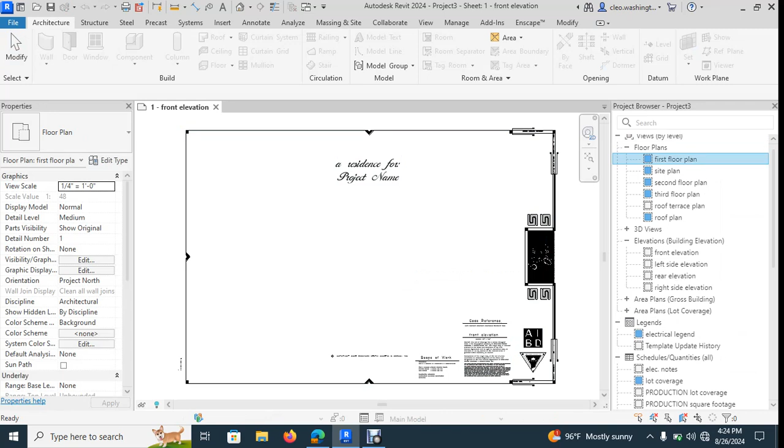And when you do work for a company that uses metric values, they'll specify as such. So you want to click on Architectural Template, make sure you have the Imperial value selected, and click Open. That's going to open up a brand new architectural template. For this portion only, mine is going to show a little bit different from yours, but it's all the same.

So when you open up your model, you're going to get this interface. Hopefully you guys went over the interface last week — that's why I uploaded that video, so you can have some familiarity rolling into what we're working on this week, which is the beginning of the creation of the model. What you'll see is when you open up this Revit architectural template, you will have a window something like this.

You won't have the reference planes drawn, so I'm going to hide them here. This is something I can show you guys — it's called hiding things in view. If you're familiar with AutoCAD, it's kind of similar to toggling layers on and off. To do this quick and dirty — there is a portion of Revit where you can actually create layers and assign different attributes to them, but we'll get to that when we get to that, probably around module 4 or 5. So just keep it simple today.

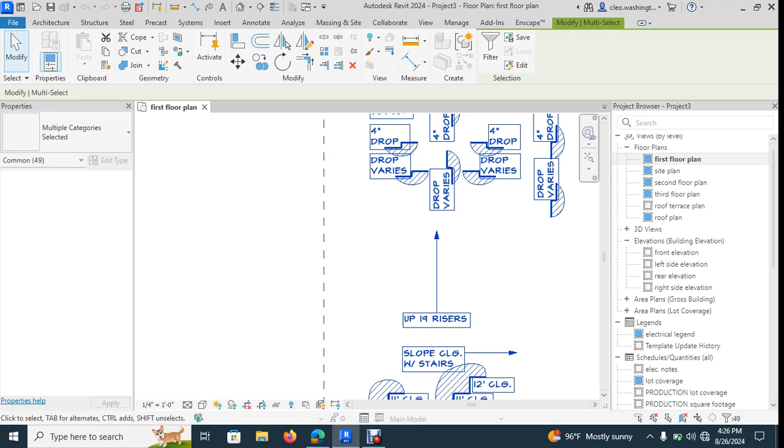If you have something in your drawing that looks like this, it's called a reference plane. I don't want to say turn them off — if you have reference planes already in your model, go ahead and select them and delete them. Right now, we don't need them shown here. These are all text and things that I use for a specified template. We won't be using this stuff in this model because you guys are working in a more simplistic template.

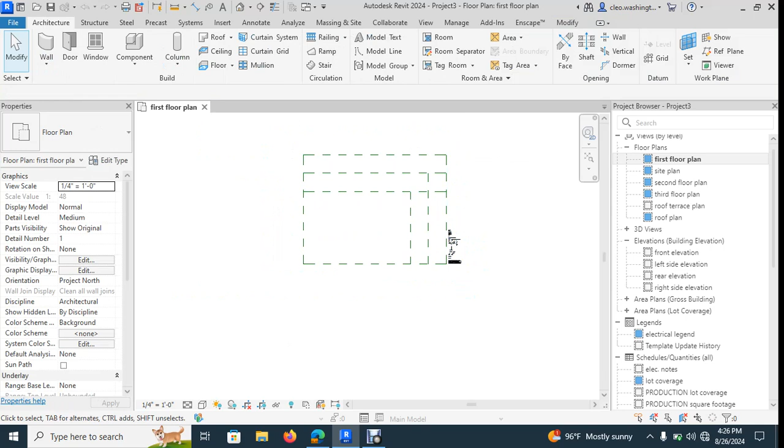I do real world projects, so a lot of the times my templates are going to be based on the projects that I'm working on and based on the specifications of that company that I'm doing contracts with. So let's just keep it clean and simple here. Let's just delete anything that's in there, and you guys will probably have some elevation markers. Just leave those alone for right now.

Okay, first things first, we're going to go ahead and start drawing the model. First thing we're going to do is draw the walls. If you went over the video last week, you know you have the architectural template, the structural template, the steel template, precast, insert, annotate, collaborate, massing and site. I won't go over them all, I just wanted you guys to have a brief overview. This is why I wanted you to watch that video last week. The way it works is we'll go through each tab as we draw the model. That's the best way to learn, and plus it will provide some repetition for you, as when you're drawing walls, you'll draw more than once, okay?

So first things first, let's go ahead and draw the architectural walls, okay? What we're going to cover today: architectural walls, how to use the selection box, the mirroring function, the create similar function, and how to use the start and end radius arc function when drawing walls. We're also going to go over the view cube, okay?

We're going to show you guys how to manipulate the scale of a project. And we're going to show you guys how to turn off and on the project browser, which is over here, and the properties menu. We'll get more into that as we matriculate. We'll show you guys how to actually look at the 3D view once we draw the walls, okay? And we're going to show you guys how to put in elevation markers and how to toggle the graphic display options, right? So first things first, okay?

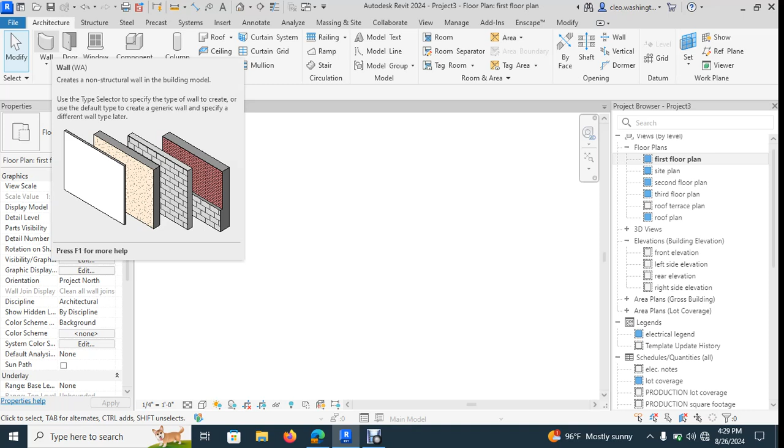Hot commands is something I am going to require you guys to use in this class, because as stated, in this course, in this software, in the field of architecture, time is money. So we want to make sure that you're maximizing your level of efficiency by using hotkeys and hot commands, okay? So instead of clicking the wall icon, go ahead and type in WA, and now you see the wall icon has already turned on and has become active, okay?

So what you want to do is go and click exterior brick. I have a bunch of different walls in mind, okay, but what you guys are going to be using is exterior brick on CMU, okay? Exterior brick with the 2x6-inch stud, all right? So you want to go ahead and click that wall, okay? You can click exterior - you want to have this one, exterior brick 2 sides - but go ahead and click exterior brick with CMU block base. That's what you guys are going to have in your drawings, okay?

So let's scroll down and go over all the wall types. We have curtain walls, generic 8-inch wall, generic 6-inch wall, generic 12-inch walls, and then we have the bricks and things of that nature.

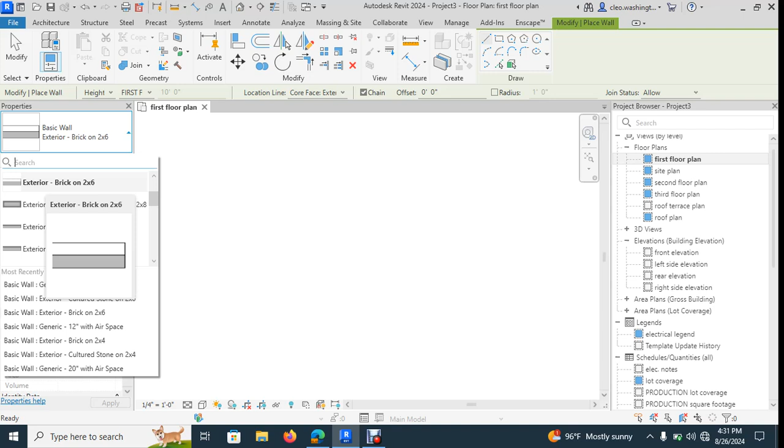Again, I do have some customized walls loaded into my template because I do all different types of exterior walls. But the wall type that you want to select is exterior brick on CMU.

So once you have that wall type selected, you want to come into the drawing menu and just click in. As you can see, you have your wall command active. So let me hit escape to get out of it.

I just wanted to show you guys how to start drawing a wall. Let's go ahead and click in, and you're going to drag to the left. We want this wall to be 100 feet. Revit actually works in feet instead of inches. If you're familiar with AutoCAD, if you type in a value and hit enter, it's going to put that value in inches, whereas in Revit, it's going to put that value in feet.

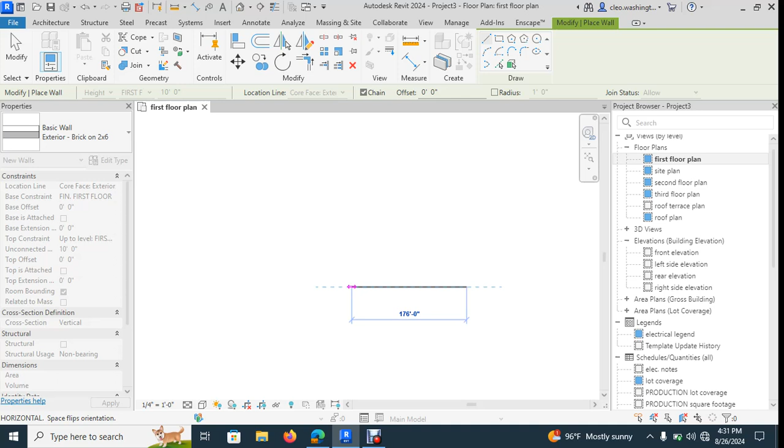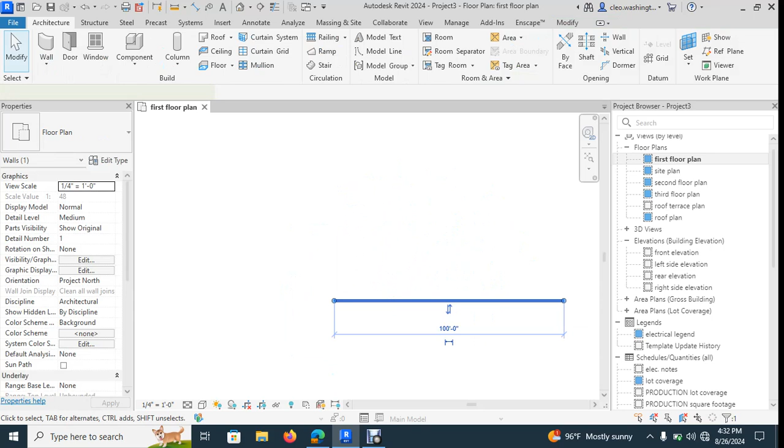As you can see, you can drag it out and kind of stop it at 100 feet, but for time purposes, you want to just go ahead and type in 100 while the wall command is active, and then hit enter. Now you have that wall, and it is actually 100 feet long. If you select it, it'll tell you that this wall is 100 feet.

Let me undo because I want to actually draw all the walls in as a chain. So type in WA, and see this option right here, chain? You want to make sure you have this option selected. If you don't have that option selected, then it's going to draw your walls separately.

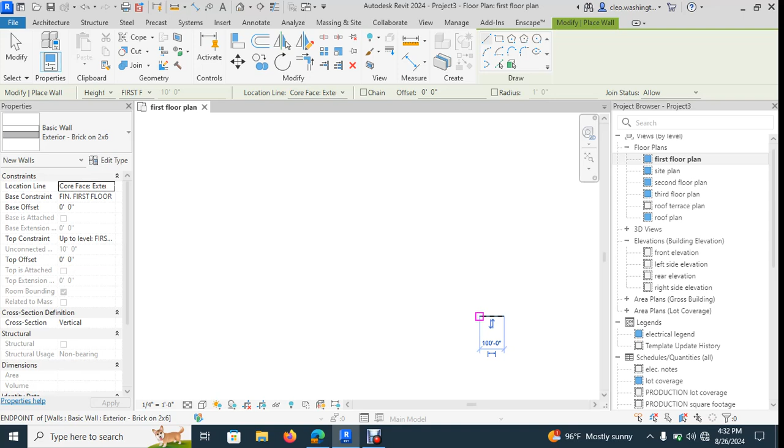So if I go here and typed in 100 and hit enter, now I have to go back and click right here to draw another wall that's going to be connected to that wall. You follow me? So you want to make sure you have chain connected, because let me give you a demonstration of how that would actually work.

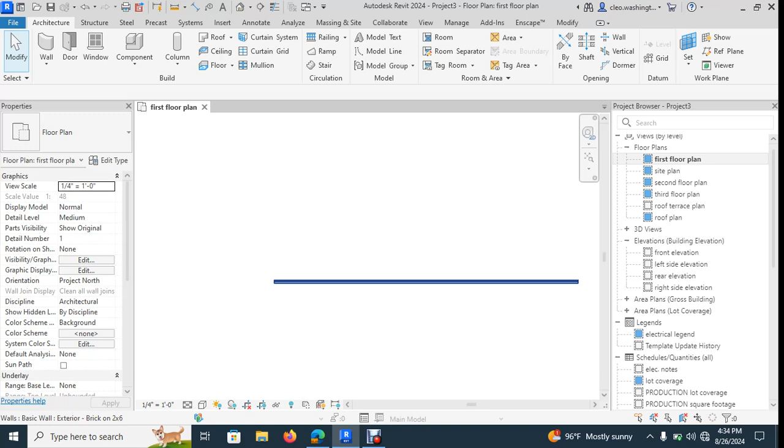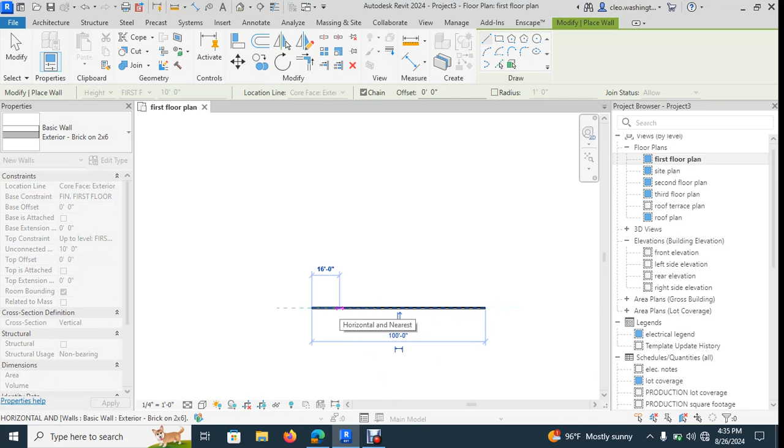Okay, let's delete this and start over. Type in WA, and I wanted to show you guys how the chain function works. Hit escape and make sure you type in WA, and check the chain function back on. You want to come here, click here, type in 100, and hit enter. Then drag your wall northward. You see how the chain function works? The walls are connected together.

So you want to come up here and type in 80. You guys can just follow me along in the video. We are actually building the model. Now you want this wall to be equivalent to the first wall that you drew.

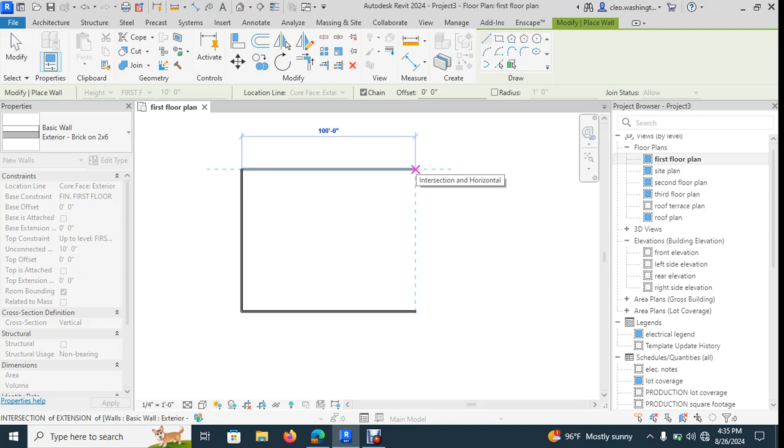So instead of typing in 100, you can just drag it. You see the blue dashed line? That lets you know that that wall is in alignment with the wall that you drew down below. That's what that blue dashed line means. So instead of typing in 100, you can just click there, and the wall is still being drawn in as a chain.

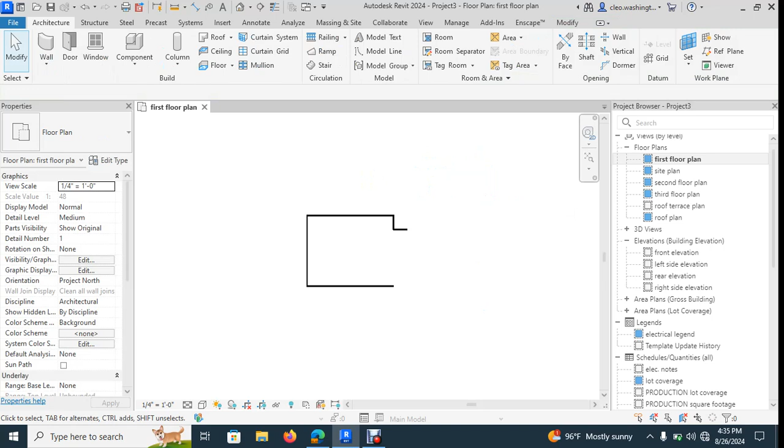So you can come and drag the wall down southward and type in 16 for 16 feet. Then let's drag the wall eastward and type in 16 again for 16 feet. Then get out of that command. You should have something that looks like this.

What Revit is doing is once you have begun to draw in Revit, you will see that while you're drawing the 2D plans, it's actually creating the 3D model.

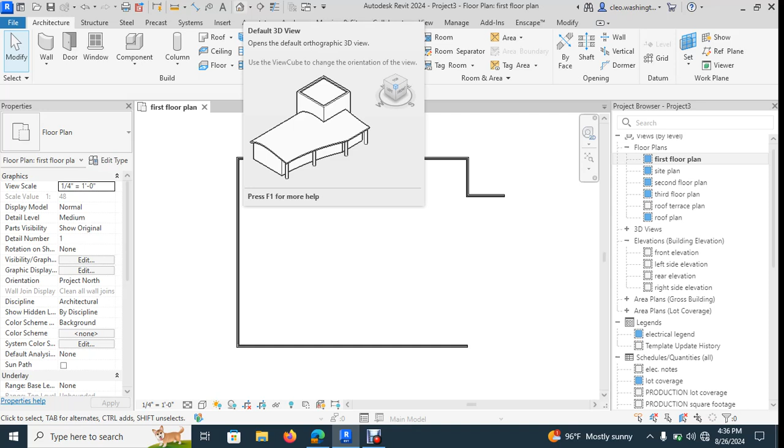So let's go up to the top right here. See at the top right here, I don't know if you guys can see my cursor, but you see this 3D house? Just click on it. And it's going to give you a three-dimensional view of the walls that you had just drawn.

Now, first things first, if your walls, you should have walls that have a gray bottom and a red top. You should have those types of walls, right? So now what I want to do is go here and let's go to hidden line.

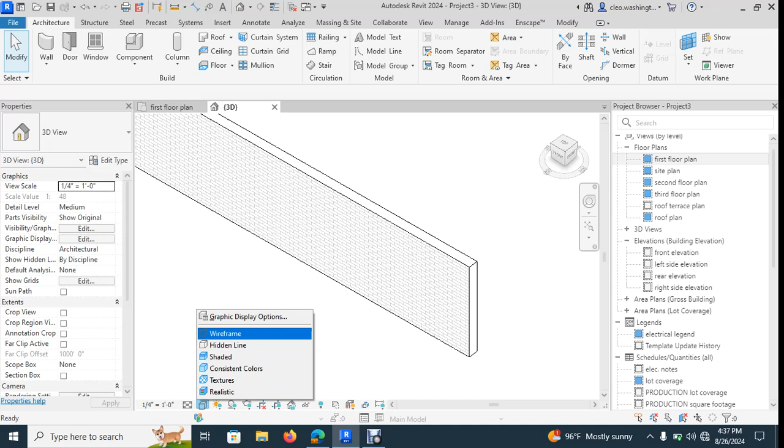Let's pause it right here. Okay, let's click this little cube at the bottom. See this little cube? It says visual styles. You click that.

You can turn this wall into a wireframe, or go back and click that cube and tell it you want it shaded. Or click the cube and tell it you want consistent colors, which puts actual color and texture to it. But we'll get into that a little later, I just wanted you guys to see it.

Actually, go back and put it on hidden line, that way your computers aren't working too slow. But I wanted you guys to see something as it regards how Revit actually creates a 3D model.

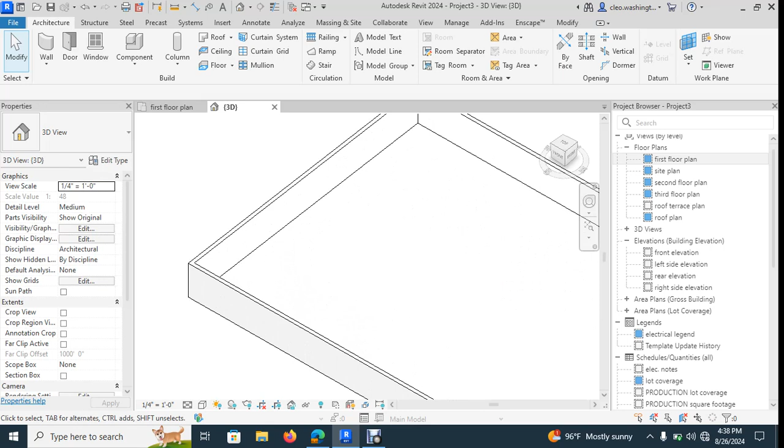Before we go back to the first floor plan, I want to show you something. You see this wall, how you have the brick on the exterior? And see this wall around the backside - if you press down the wheel on the mouse and hold down the shift key, you can orbit around the model.

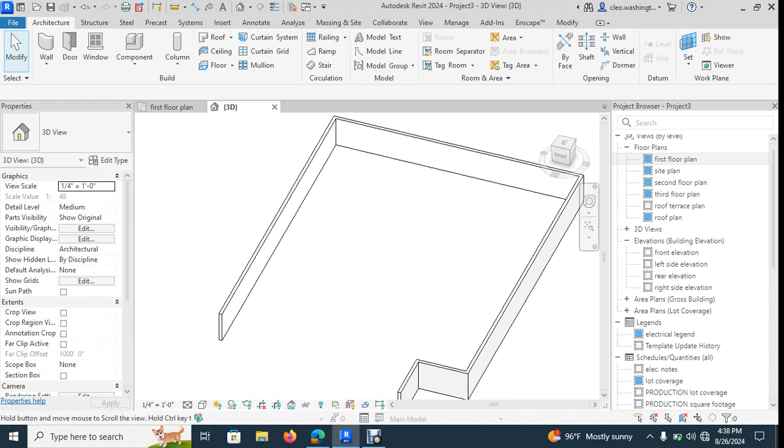Just press down the wheel and hold shift and you can orbit around the model. If you just want to pan, just press down the wheel and you can pan around. But if you need to orbit, press down the wheel, hold shift, and orbit. If you just want to move it around, just press the wheel down - that's how you pan the model around.

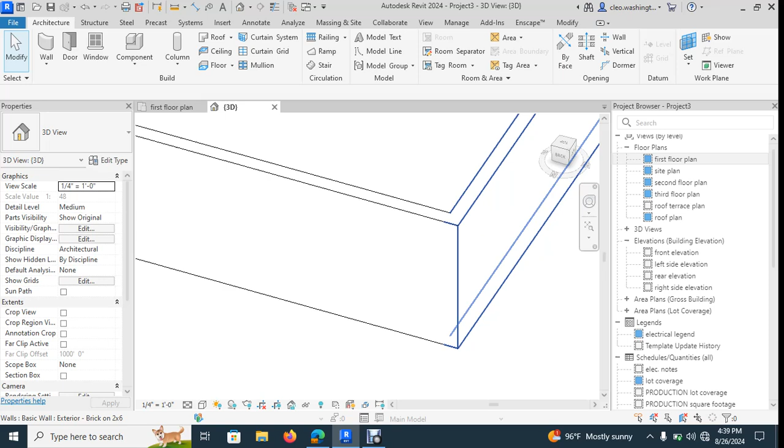Check this out - sometimes the walls come in inverted. These came in right, so I'm going to invert it. Say it came in like that with brick on the exterior, and on this side you have the brick wall on the interior. That's not supposed to be like that, right? So you want to select that wall, and to flip it you hit the space bar, and now the brick is on the right side of the wall.

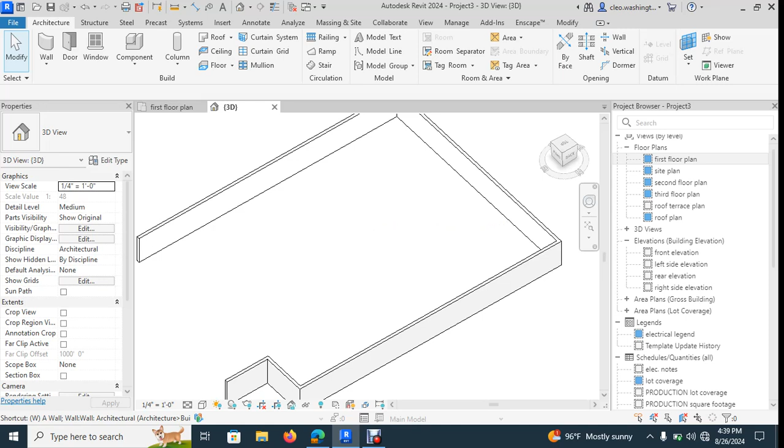Now let's view that in plan, but before we do, I'm going to show you how to view multiple windows at once. You can type W for window, and T for tile - that's called window tile. That way you can look at your floor plan and your 3D model all at once.

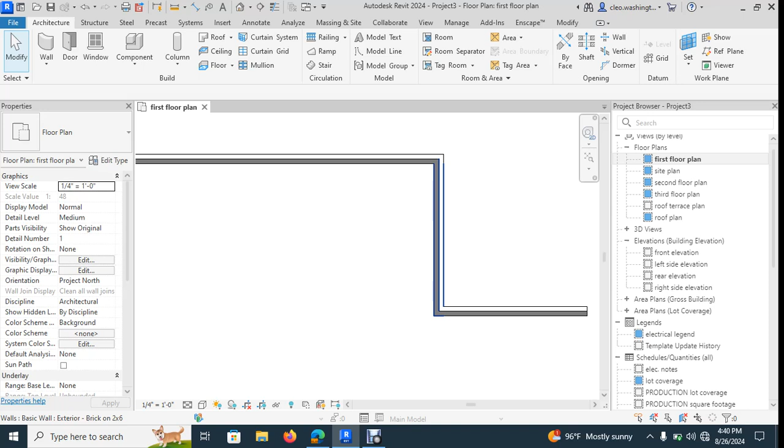When you're getting ready to get out of it, just close the window you don't want to see. So let's go back to the model. You have all of these walls, and let's display how that function works in plan.

Say if this wall was flipped in like this - you see the hatch line right here? That's the brick side of the wall. So you know it needs to be on the outside. You can select it, hit the space bar, boom, there it is - your brick is on the outside.

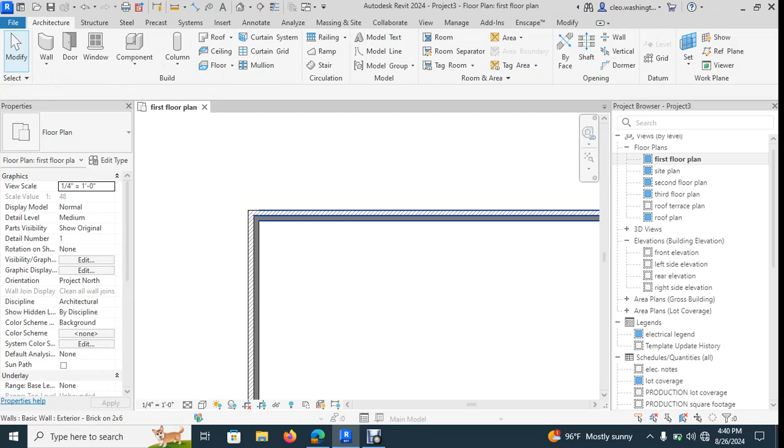Also, you can select the wall - you see these arrows right here? You can hit the arrows and toggle them as well. So just a little caveat as we move forward.

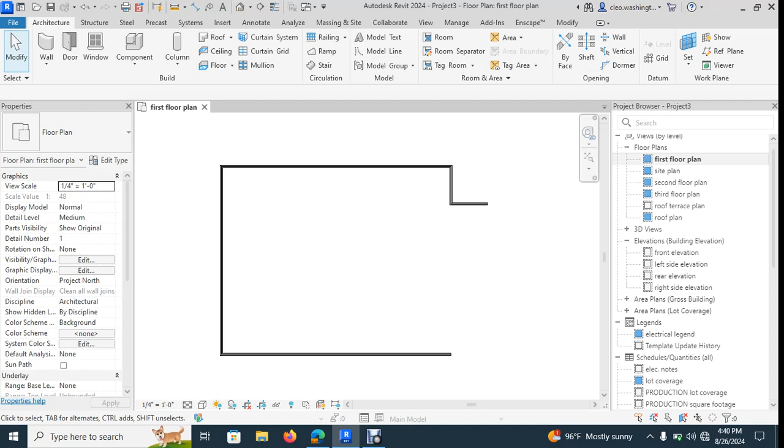Now we're going to show you how to use the mirror function, another tool utilized in the Revit setting to save time. So what we're going to do is draw a reference plane. To activate that command, you type RP. See over here in the properties menu, it says reference plane - we'll go over the properties menu in a second.

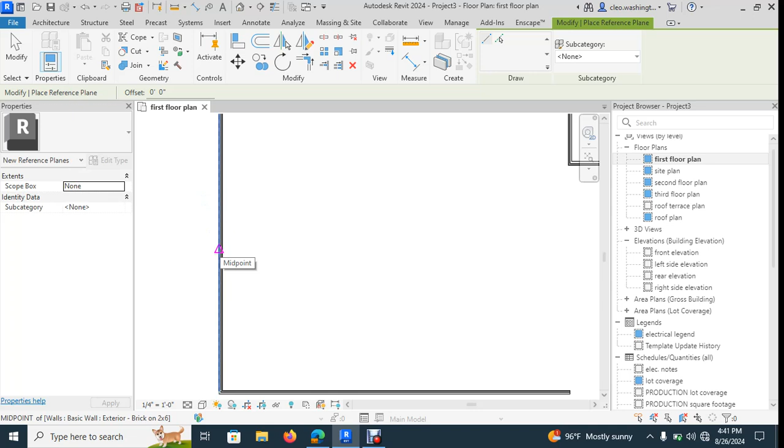So you want to zoom in on the west wall, and select where it says midpoint. Whenever you see a triangle on something, on the end it's going to show a square that lets you know you're on the end point.

When you get to the midpoint of a wall or whatever you're trying to get to the midpoint of, that midpoint triangle is going to show up.

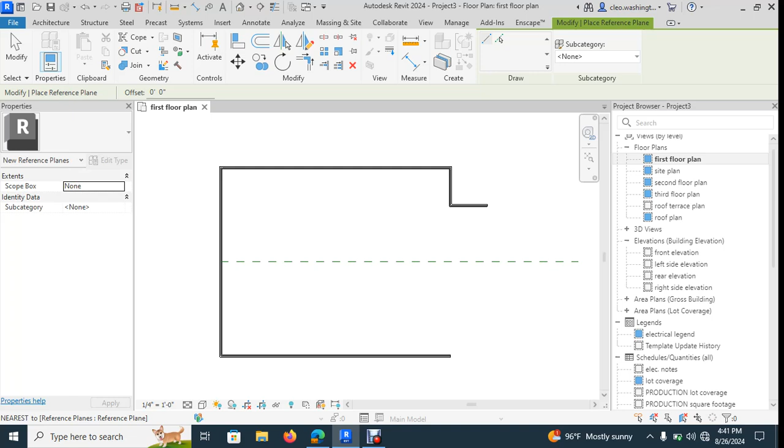So let's draw a reference plane, okay, and you want to stretch it out eastward. When you select it after you draw it, you have these little pulleys, I call them, these little brown, round little deals here.

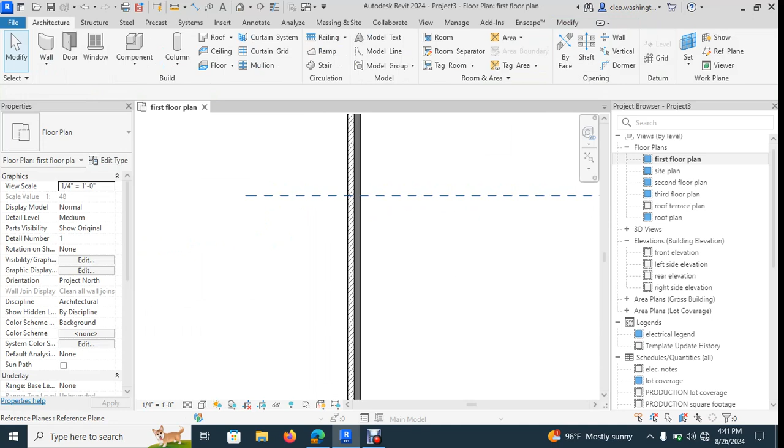And you can grab those, I call them selection boxes or selection circles, and you can actually name the reference point. You can click it and then click in here and just say center, because you'll get to a point where you have so many reference points or reference planes in your model, you'll have to name them.

And it's just a reference plane, it's not a part of the drawing. If you actually click back into the 3D setting, you'll see the reference plane is not there. So go back to the first floor plan, it is there. And why are we doing this, okay?

Let's say if we had all of this top portion of the building drawn, and let's just take this wall and click it and delete it. So what we can do to save time is you can use the mirror command.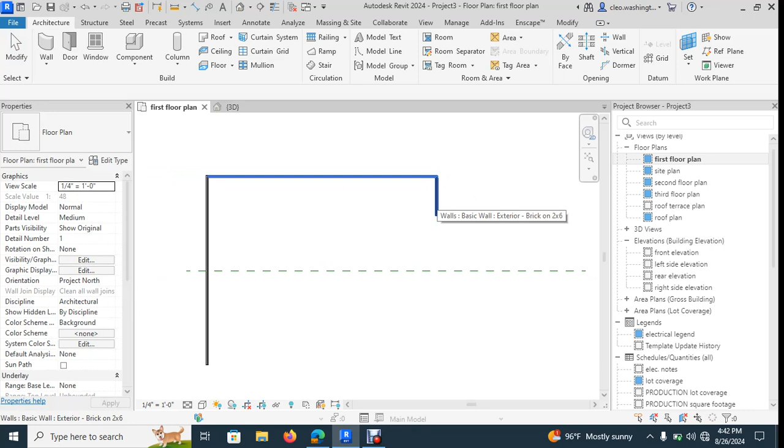And the way you activate the mirror command is by typing MM. Then you want to select the items that you want to mirror, and you can select multiple items. Let's start over. Let's say you type in MM, and you select this wall, and you want to select this wall as well. But if you select this wall without doing something special, you can only select one wall.

But if you want to select multiple walls, two ways you can do it. You can drag and select all three of those walls, or you can type in MM for mirror and select this wall, hold down the control key, select this wall, hold down control again, and select this wall. If you wanted to deselect a wall, you hold down the shift key while you're in the mirror command and you can deselect it.

But let's select them all while we're in the mirror command. And what you have to do now is tell it that you want to mirror these walls about this center axis. So once you select this center axis, let's see, MM. And it's not working.

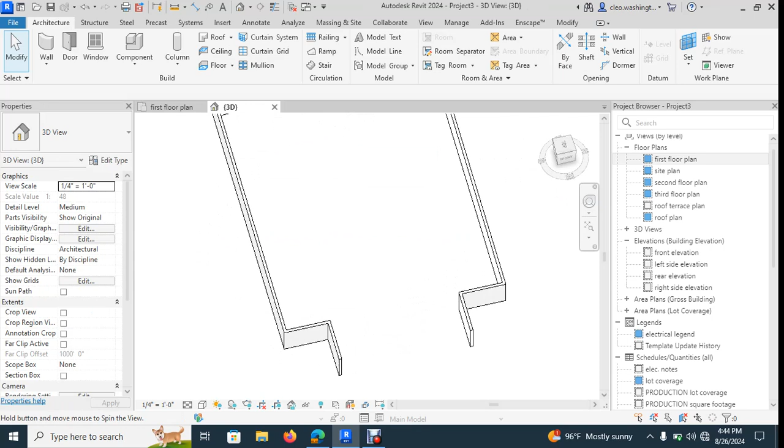So what you want to do is select the walls that you want to mirror, and then type in MM and select the axis that you want to mirror them about. Okay, so there you have the same walls that were at the top, now drawn at the bottom. If you click on the 3D tab, you'll see now that you have the same exact walls.

And again, don't fret, your walls are going to be a little bit different. You're going to have a brick top and a CMU base at the bottom. So that's what your wall is going to look like. So let's go ahead and close the 3D tab.

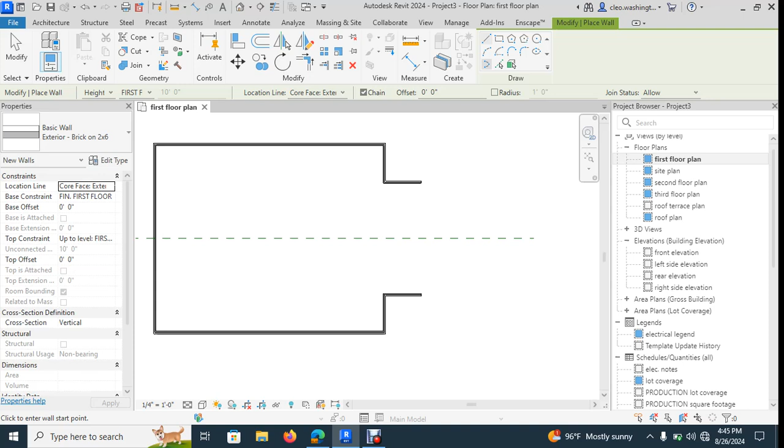All right, the next thing we want to do is draw another wall from here to here, but this wall we're going to use the start-end radius arc tool. So you type in WA to activate the wall command, and up here at the top under the draw menu, you want to select the start-end radius arc tool. So select it, and then you want to come, okay.

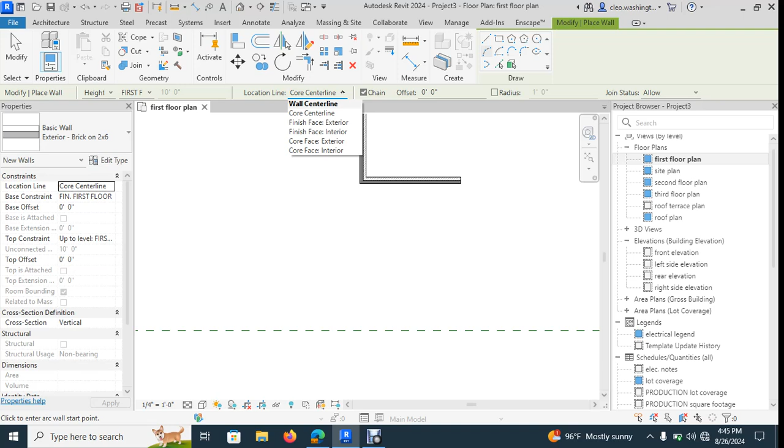And you see this location line? It says core, wall center line, finish face exterior. For this one, let's go with the wall center line. That way you come to the center of the wall and you select it. And then you drag it down, and then you snap to the center of the wall.

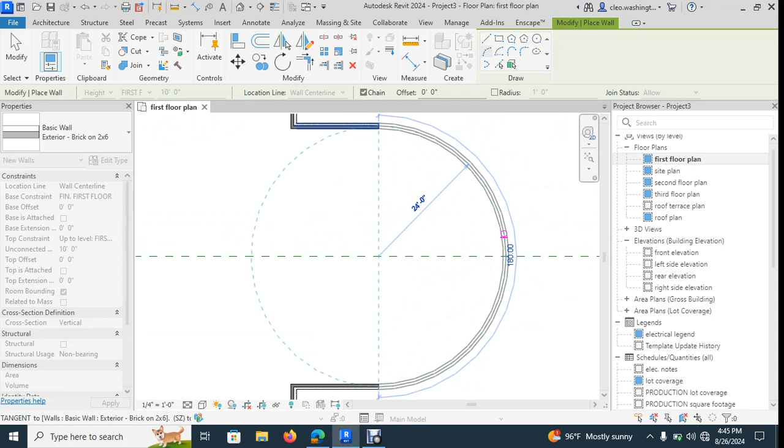Now keep in mind you have the start-end radius arc button selected while you're in the wall command this time. And now you're getting ready to draw an arc, and you want to make sure that arc is at 180 degrees and is actually going to snap there for you. But you can actually just type it in, hit enter. Wait, let's go back and redo it.

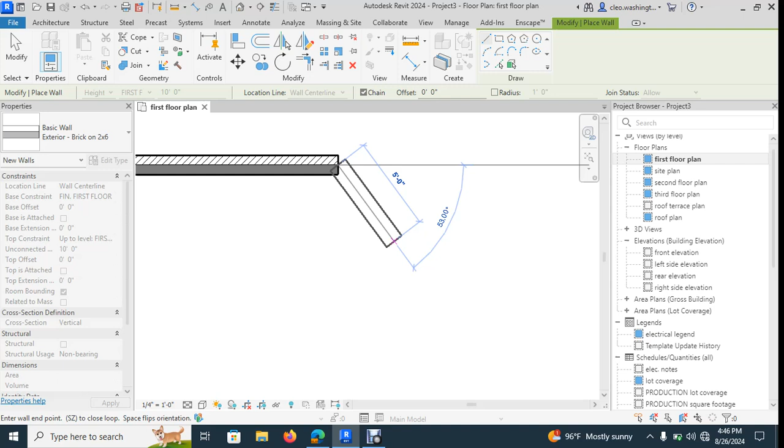Type in WA for wall. Make sure wall center line is selected, okay? There's one thing I forgot to show you, I'm gonna go back and show you. You want to snap here, and then what did I forget to do? I did that on purpose, because a lot of you will make that mistake and be like, oh, what did I do wrong? So delete that wall. Make sure you type in the wall command, and make sure you have wall center line selected.

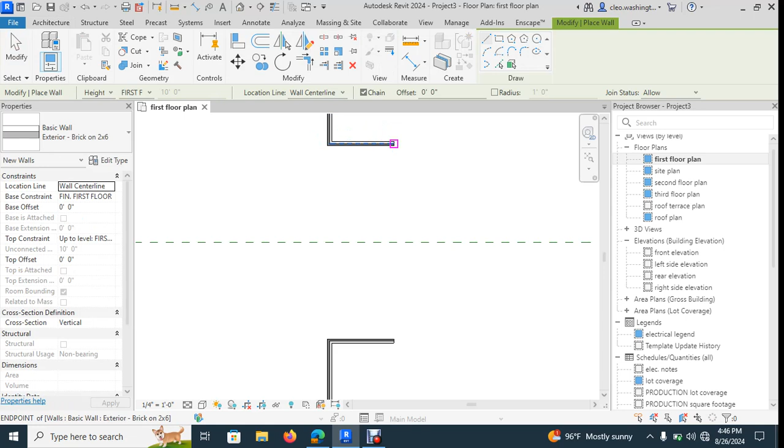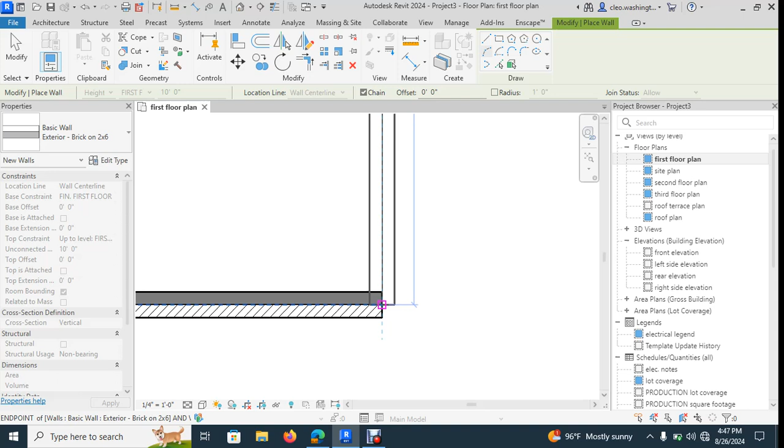The one thing you have to do is tell it what type of wall you want it to draw. Right now you're drawing a straight wall, but you can draw square walls, rectangle walls. Right now we want to select start-end-radius arc. You want to select the center, drag down, select the center, and just snap the wall out to 180 degrees. Now you can select the wall and change the radius if you want, but it's easier to just go ahead and snap it. It'll snap to a specific degree for you.

We'll draw other arcs on the other portion, on the west wing of the building, where we'll show you how to manipulate that in detail. I don't want to overwhelm you guys thus far, okay?

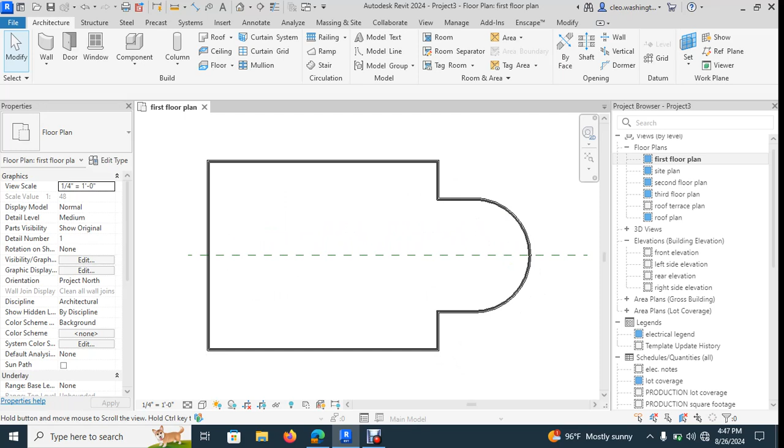So yeah, that's pretty much what we're going to be doing just for this week. And when you click the 3D view, you now see that you have the walls of your building drawn. Now let's talk about the properties menu. We'll go over this because we're going to talk about the properties menu, the project browser, and the view cube and how you use that.

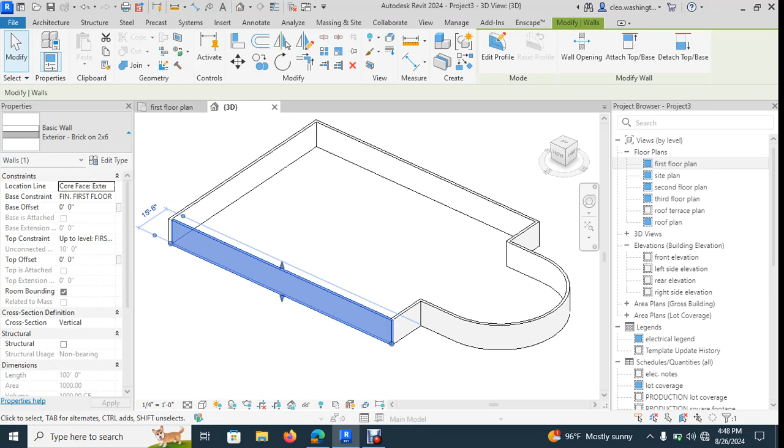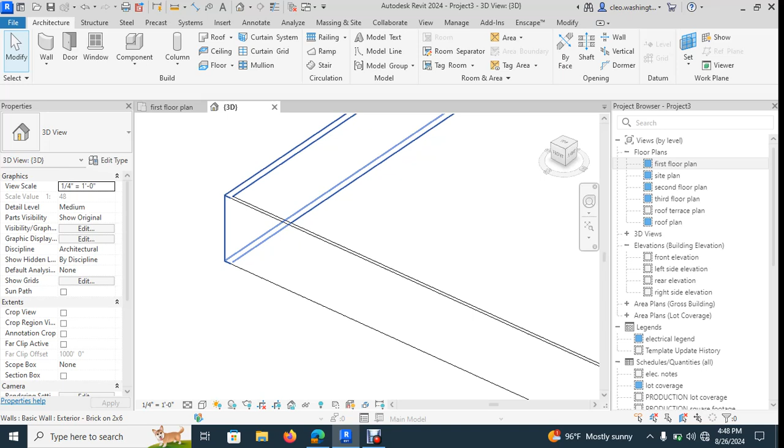So properties menu, it is what it is. If you select the wall, then everything regarding that wall is going to be in this properties menu. So you select the wall, it's going to tell you what type of wall it is. It's a basic wall, brick on 2x6 stud. Yours is going to be exterior brick on CMU. But you can change that wall. If you wanted to change that wall type, you select that wall, come down here to the drop down menu, and say if you wanted a curtain wall, or something like just a regular 6-inch wall, now you have a regular 6-inch wall. We typically don't use that on the exterior, we use that on the interior, but I just want to show you guys how you can actually change the wall types.

So you want to go back to exterior brick on 2x6 for me, and for you, exterior brick on CMU. Then select the wall again, and the base constraint says finish first floor. I don't want to get into too much of that right now because I don't want to confuse you guys. I just want you guys to get a familiarity with the properties menu and how you manipulate that.

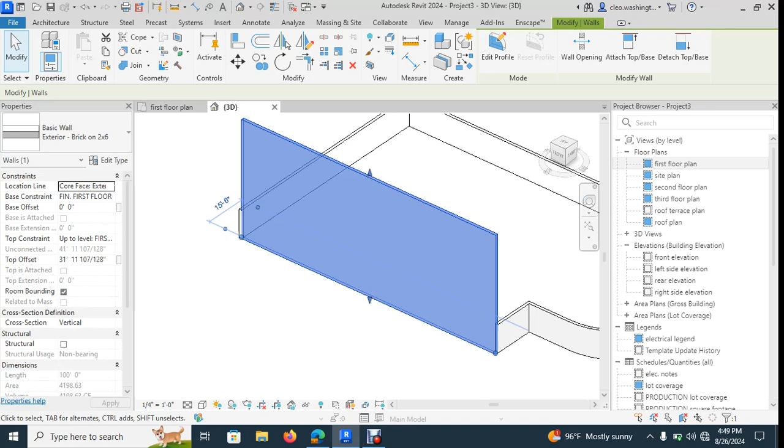Then it'll tell you the top constraint. So you can take this wall and drag it up if you want to, and as you can see, the top constraint has changed. Now this wall is 31 feet high. If you wanted that wall to be 12 feet high, you would come here and just type in 12 and hit enter, and that wall would drop down to 12 feet. This is the menu we're going to use when we want to manipulate things. So let's undo that, keep our wall similar.

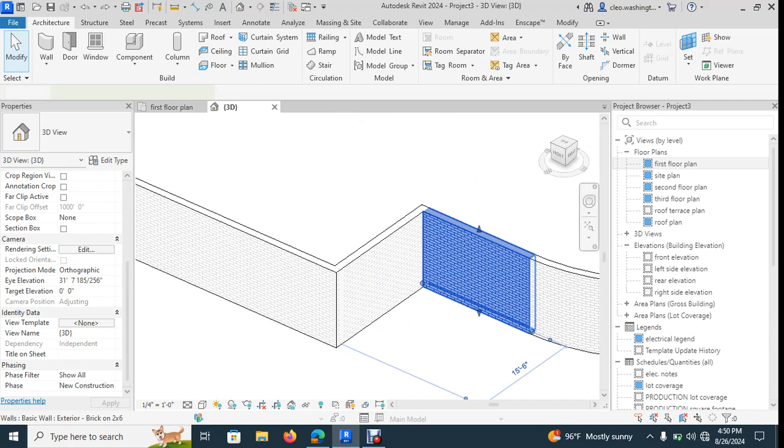Now, one other thing I want to show you is called the hide in view command. Say if you had a lot of things on the interior of your building, and because we are building a 3D model, we're going to build an entire building, it's going to have interior walls, it's going to have furniture. Well, sometimes things can be pretty hard to see. So what you can do is select this, right click, and go to hide in view and select elements. Now that portion of your wall has been hidden in the view.

So if you had something in this wall that you really needed to see, like an interior wall or a plumbing fixture or something like that, then you would actually see it, okay?

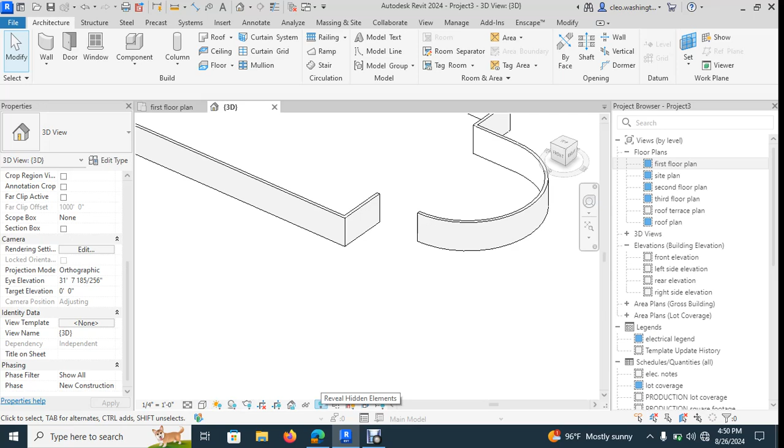And what you can do to turn it back on is you'll come down here. You see this little light bulb? This is the reveal hidden elements icon. So you select it, and it's going to show in red what's been turned off in that view. You can select it, right click, and go to unhide in view, click elements.

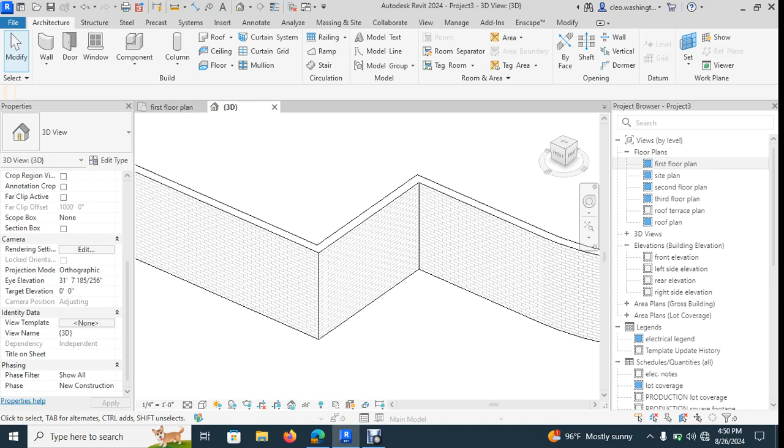And now that wall is turned back on. You turn the reveal hidden elements icon off, and as you can see, the wall is now back where it should be, okay? So that's pretty much it for this lesson.

Let's talk about the project browser. This is where you're going to browse everything, okay? This is where every drawing that you create is going to show up in this project browser. For example, we just drew the floor plan, right?

So you can click on the floor plan here. Say if this was closed and you was just in 3D mode. You can come here, okay, and it'll show you whichever one that that's highlighted, it'll show you what drawing you're in. So sometimes you have to expand it, okay? All of these things, they contract and expand.

So sometimes you have to come in and expand it. I say as soon as you open up the drawing, just expand everything. That way when you're in a drawing and you're looking for it, you can find it. But right now you see 3D is emboldened, it's very dark. That lets you know the drawing that you're in.

So say you wanted to look at the floor plan, you would come here and click floor plan. And now, as you can see, first floor plan is the darkened or emboldened name because that's the view that you're in. So if we close this 3D view, now the floor plan is already in bold letters because that's the view that you're looking at.

So that's what the project browser is. First things first, I don't want to get too detailed in it because I don't want to get you guys too confused.

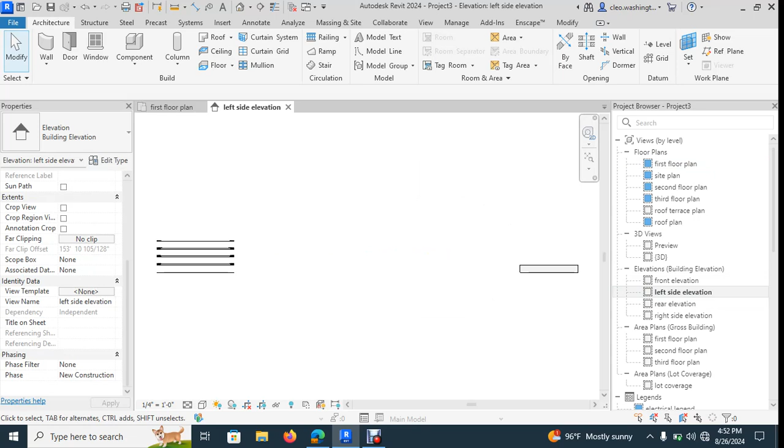But yeah, whatever drawing that you're in, let's just say if you was looking at the left elevation, okay, and we'll get into that next week, but this is the left elevation of the building. As you can see, this is the wall that we've drawn, and that left elevation is in bold letters because that is letting you know that that is the drawing that you are in, okay? So always keep that in mind, all right?

So hopefully you guys went over everything with the ribbon last week. Again, we'll get more repetitious with this as we go through the project, and you'll become more familiar with it as well. Let's talk about the scale.

This is the floor plan. Most floor plans are drawn at 1/4 of an inch. You see this guy right here? This is the scale of the drawing. Scales are vitally important in architectural drawings because we have to make sure things are to scale. We will get into more detail as to why as we matriculate throughout this course, okay?

But what you want to do is you want to go ahead and, say if you wanted to change the scale, okay, because you'll have to put these drawings on a sheet. Sometimes the building is just way too big to put on the sheet and you have to change the scale. So you come here and you click the scale and all of these different scales pop up. So say if we wanted to change this drawing to 1/8 of an inch, then boom, now the drawing is at 1/8 of an inch.

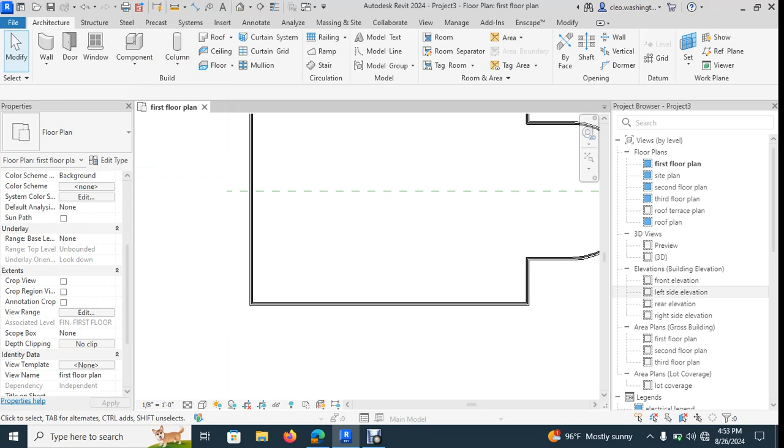You can't see it here, but typically if it's on a sheet, you will actually see that scale size change. But again, I do not want to give you guys too much, so we'll just keep it at 1/4. I'm just going over some things that we're going to be utilizing, okay?

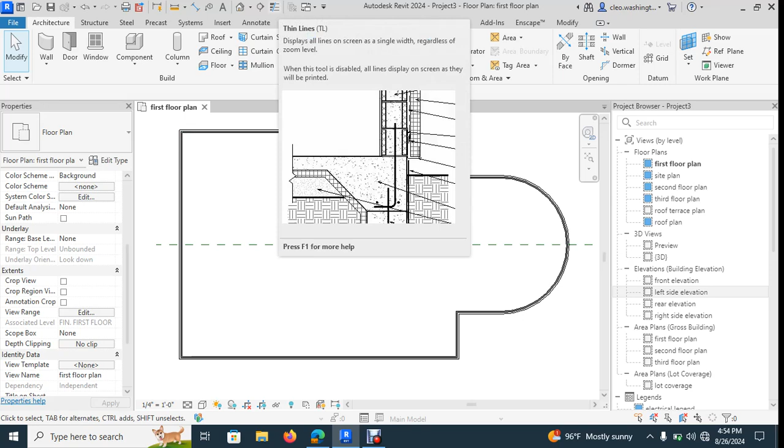Now, let's talk about the thin lines command, okay? You see this icon here? This is called the thin lines command. The hot command is TL, okay? Typically, we'll get into this when we start doing details, but you see how everything is in bold?

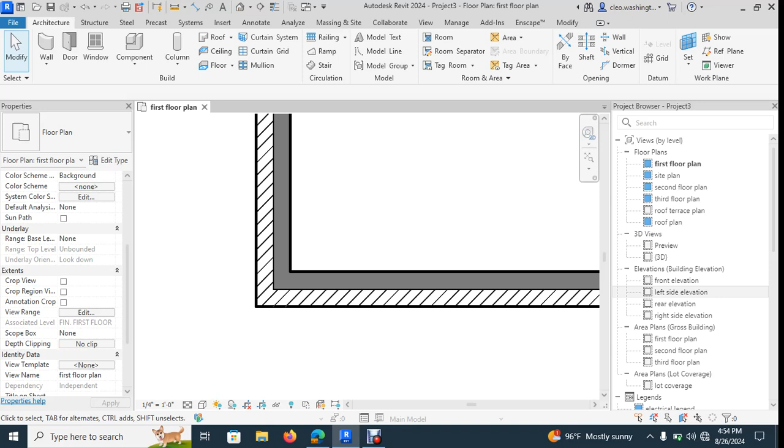If you type TL, that turns the thin lines command off. Type TL again, and that turns the thin lines command on. When you start doing details and really have to zoom in, it's good to turn the thin lines command off. That way you can see things a lot more clearly versus the thin lines command being on.

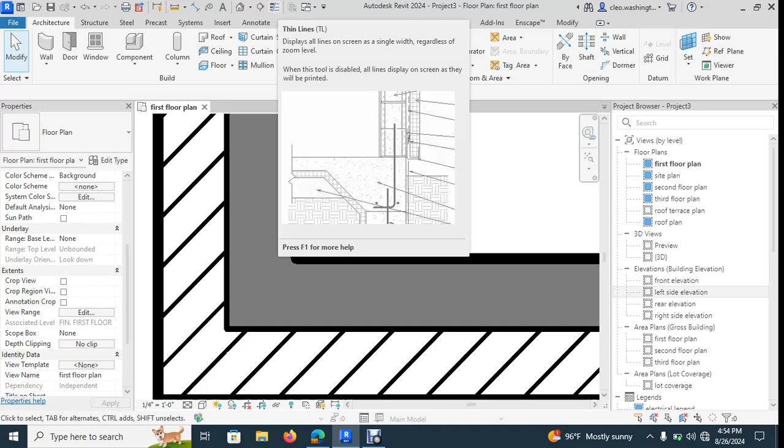For example, you see the icon that pops up when you hover above the thin lines command? When you start drawing details like this, you're going to have to utilize the thin lines command to actually see things in the drawing because you have so many building components in the building.

We talked about 3D view, we talked about graphic display options, and we talked about elevation markers. However, I'm not showing them here. You probably already have them in your drawing.

So let's go to the annotate tab, okay, let's go to the view tab. And you see this button right here that says elevation? Click that button. You have two types of elevations: building elevations and interior elevations. But leave it set on building elevations.

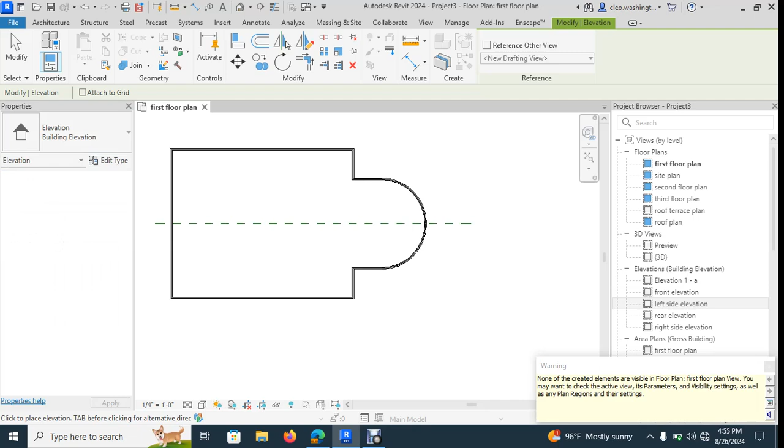So what you would do is you come in and type building elevation. And if you get that warning, that means the building elevations has been turned off in your model.

So what you do is you type VV, victory victory, and you go to annotation categories. This is where you turn things on and off in your drawing. They also work like layers in AutoCAD, but I don't want to get into too much detail here because I don't want to overwhelm you guys. There'll be plenty of times, especially when we get into module number 3, where we're going to cover this expressly. I'm just going through everything that could be pertinent at this time, but I could be giving you guys a little bit too much.

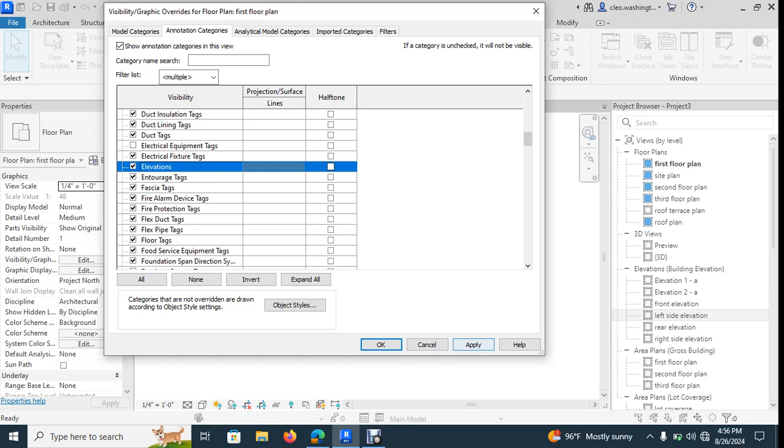I don't want to go over too much right now. But you see, elevations tab, it's turned off. If you turn it on and click OK, now you see these elevations tabs. And if it's like this, delete it because we like it to be straightforward.

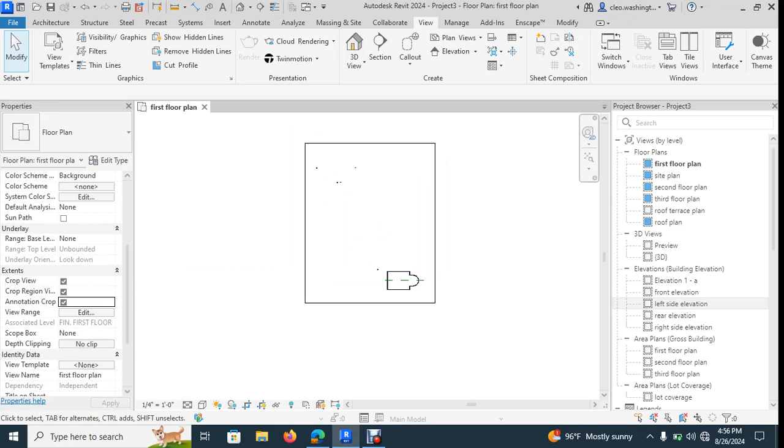So you have one here, and let's talk about the extents here. You have crop region and you have annotation crop. Make sure all of these are turned on. This is your crop region, and what you can do is select this and manipulate it to show only a portion of the building. And this is the annotation crop.

In fact, turn the annotation crop off for now. We'll get into that later because I don't want to give you guys too much and discourage you, because that can get a little bit complex right now since it's expressly utilized for when we're adding text to the models and things of that nature. So we'll go over the annotation crop later.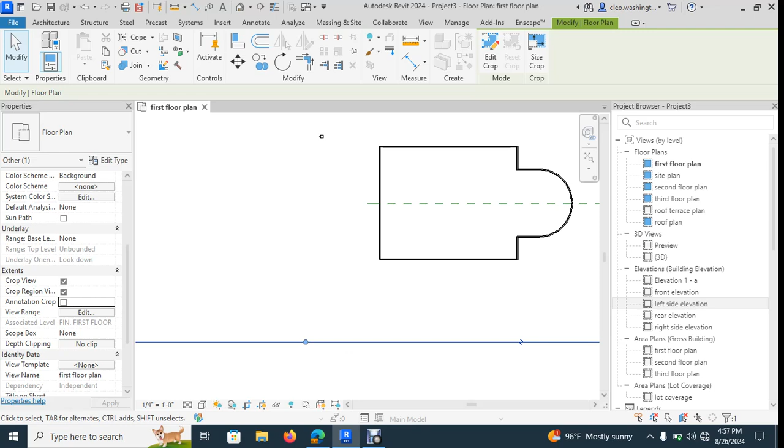But what you want to do is come here, and this is what's going to be shown in your drawing. As you can see, all of my elevation markers have been dragged off to the side here. So let's go ahead and take them, using what I call the highlight box. You never want to highlight going this way, because then you'll highlight things improperly — Revit is modeling in 3 dimensions as you draw in 2.

So if you highlight, let's say from left to right, you're only going to highlight what you're seeing in your screen. If you highlight from right to left, you're going to highlight everything that's in your screen and everything below it. I know that does not make sense right now, but as we go further into the drawings, you're going to see.

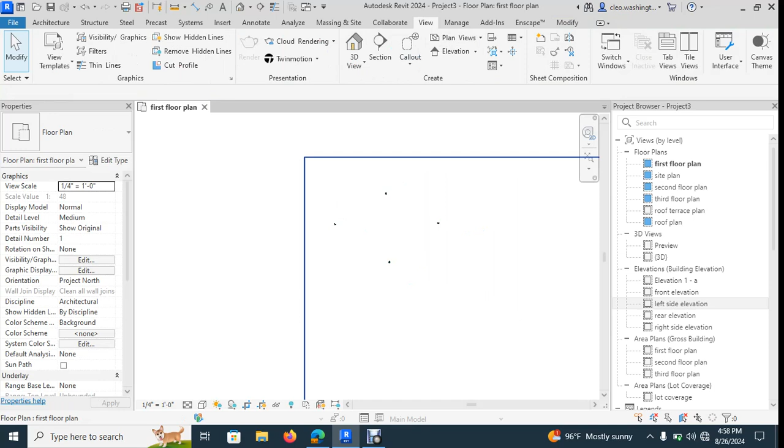So let's drag from left to right and type in MV for move. Let's move these guys over here, and they don't have to be perfect. These are your building elevation markers. Let's click that one and delete it. If you have any additional markers, you only need 4 of them, you can delete them.

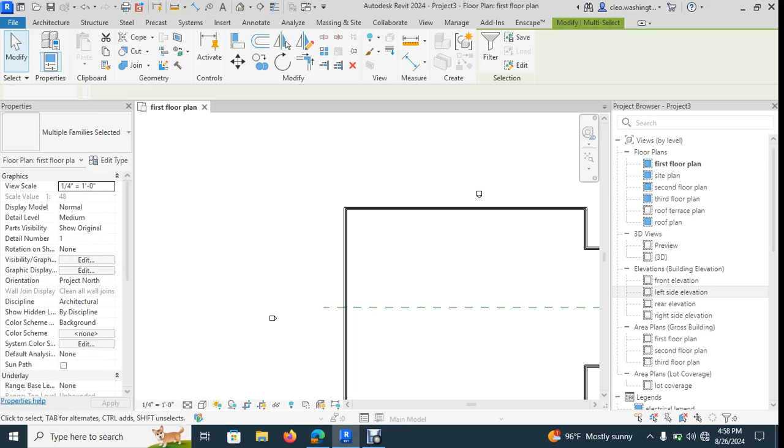But what you want to do is take this one and line them up evenly around the building.

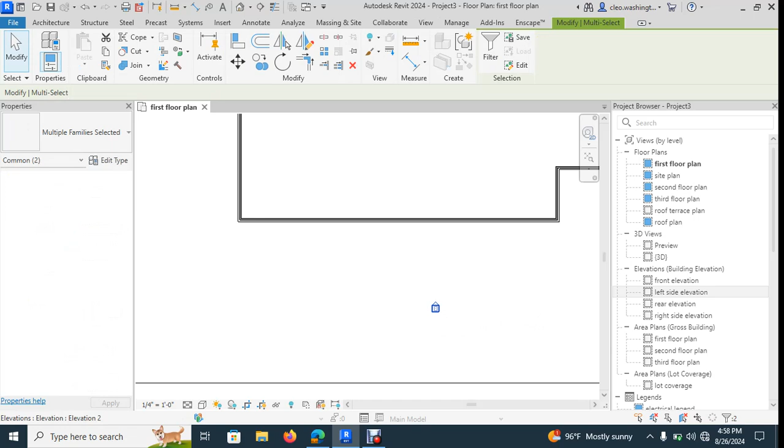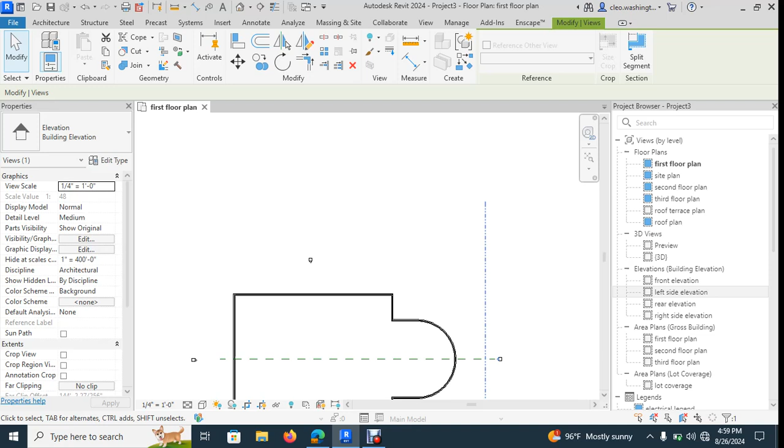They don't have to be perfect, but you want them centered on each elevation, like I'm showing here. You can take this one, and you don't actually have to type in the move command, even though you can type in MV to move it. When you highlight it from left to right and hover over it, a quick move tool will pop up, so place it in the center of the wall to the best of your ability. Again, it doesn't have to be perfect. We'll get into this a little later, but when you click it, you see this little line pop up. We'll talk about that next week. Now let's go back

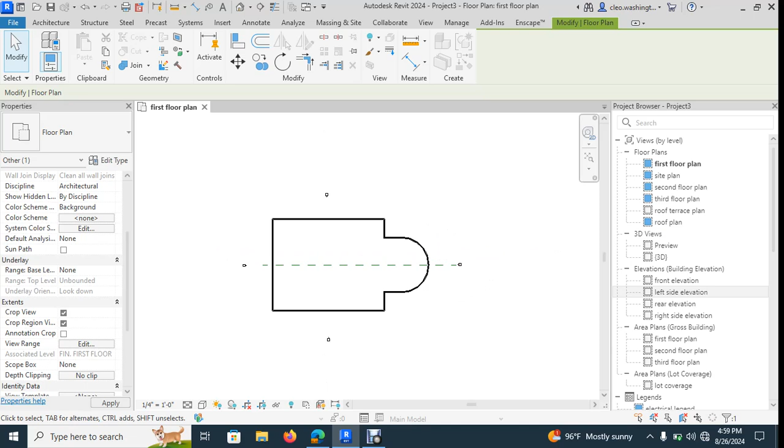to the crop region. This is how you crop the view. You want to crop the view so that way you can tell Revit what you want to show in the view. So once you crop the view, what you'll do is come right here.

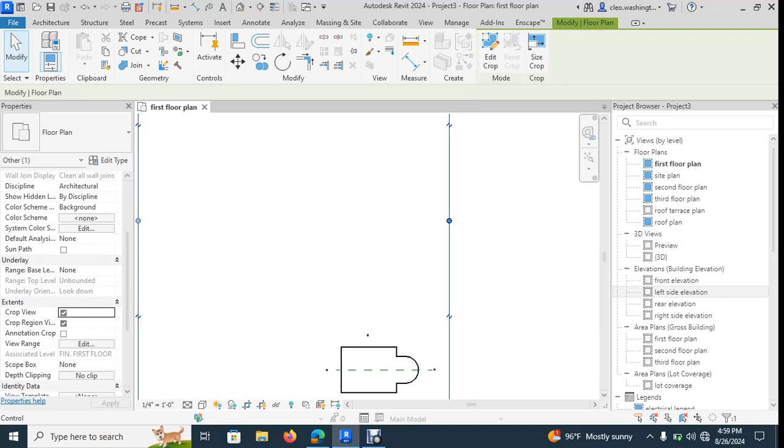You want to bring this one closer, right here. You're going to come down and grab the grips—this is how you move the crop region. Bring it close to the elevation markers, but don't go past it. If you go past it, your elevation markers will be cropped out of the view. We like to show those on the plan, so make sure you can see them when you crop your view. This will make more sense as we build the building and see what the annotation crop is utilized for.

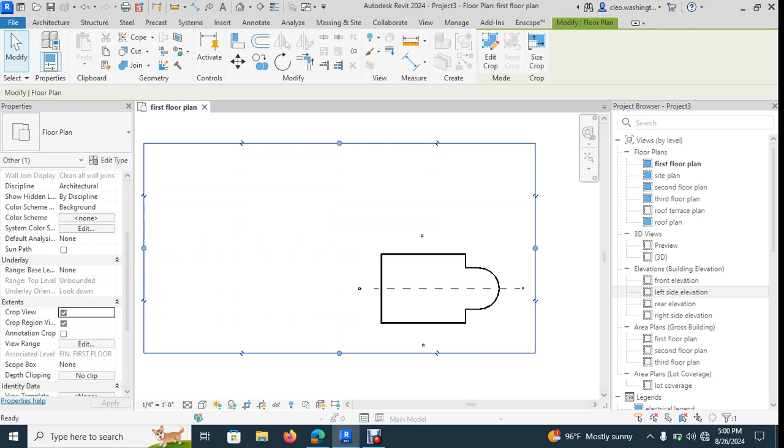So that's the view you want to have—your crop view. We don't want to show everything that's over here and way out here. So let's hit Control and Z to undo what I just did.

Now what you can do is have the view cropped, but turn the crop region off. So uncheck this one, and now you have your view crop, but it's turned off. This is very pertinent—we'll determine why as we matriculate throughout the course.

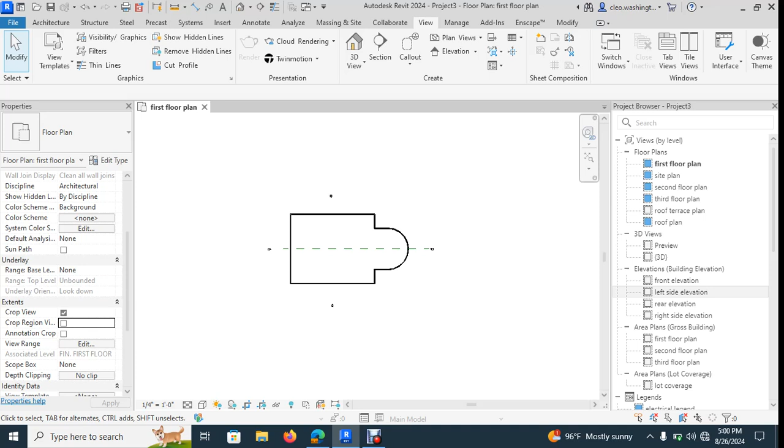So again, go ahead and click your 3D house to see what you've done for today. We're going to talk about adding some windows and doors. I'll do something really quick—I'll type in DR for door, and you can place a door right here.

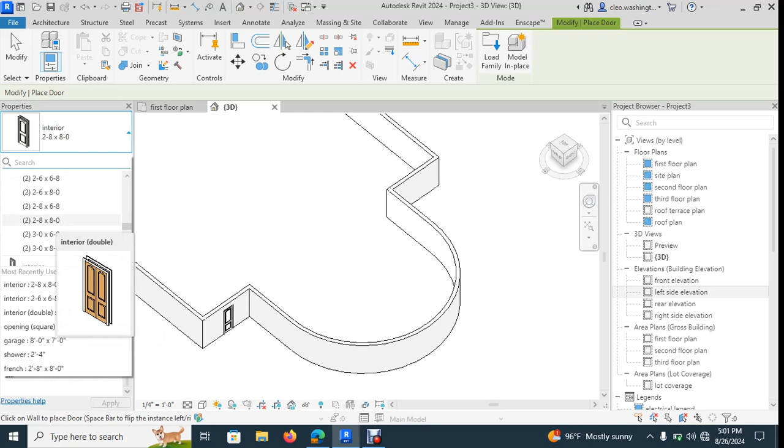You can type in DR for door, same with the walls. You have all types of doors in your projects, so you can scroll down and select double doors and different door sizes. Again, you guys don't have all of these door sizes like I have, but you do have some standard default door sizes in your model.

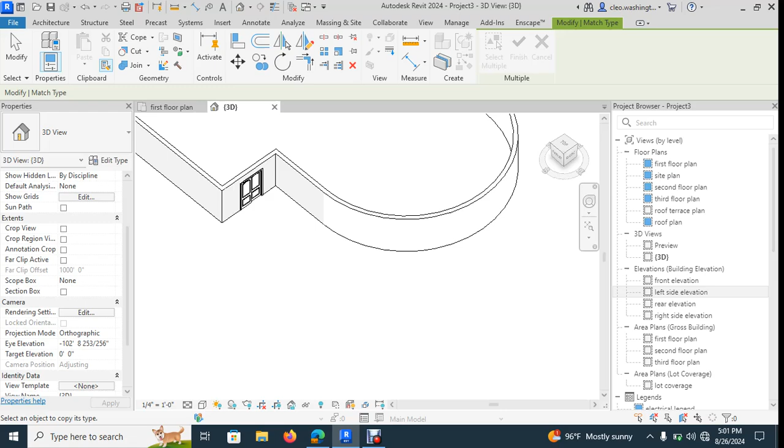So you can come here and put another door right here. If you don't like this door and you like that one, you can type in MA for match, select that door, and then select this door, and now you have the same door. You guys are going to have some different doors with glass on them at this location—I just wanted to show you how easy it is to model with this Revit software.

So just look at the assignment and view it for what it is. I want you to upload a PDF of this—just read the assignment and it'll tell you what I want you to upload. As the model gets bigger and bigger, we'll start to upload the whole models so I can actually download your models and check them out.